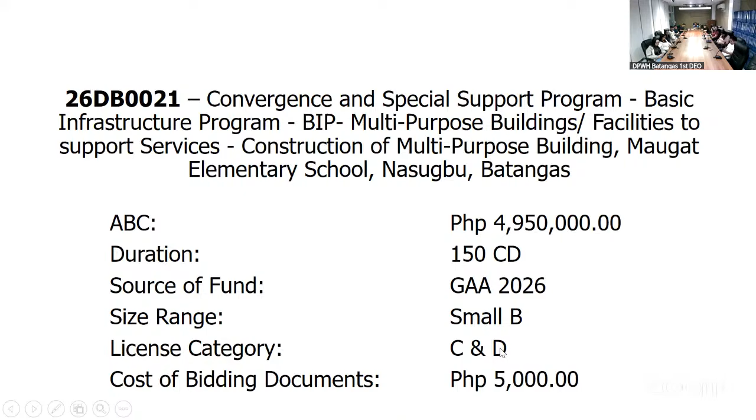To present the plans report, Ma'am Des, please proceed. Thank you. Good morning everyone, I am Engineer Maria Lourdes Mangaliman, and today I will be presenting our first project entitled Convergence and Special Support Program, Basic Infrastructure Program, BIP, Multipurpose Buildings Facilities to Support Services - Construction of Multipurpose Building, Maugat Elementary School in Nasugbu, Batangas, under the project type Construction of Multipurpose Building, with an appropriation of 5 million and an ABC of 4,950,000, and a project duration of 150 calendar days.

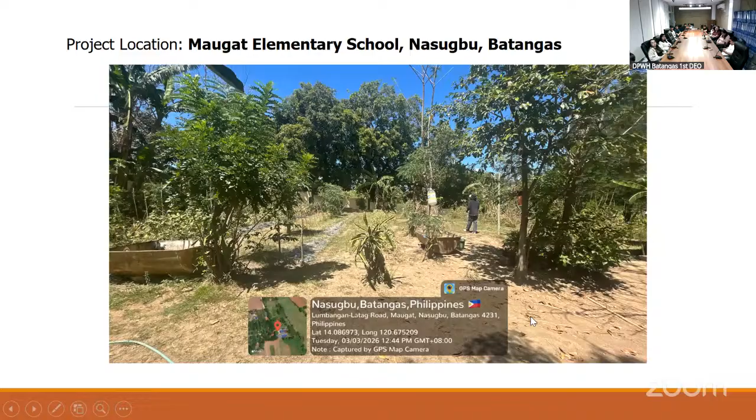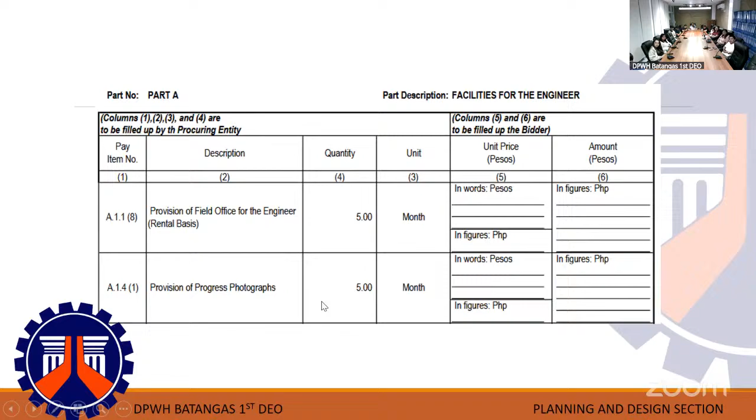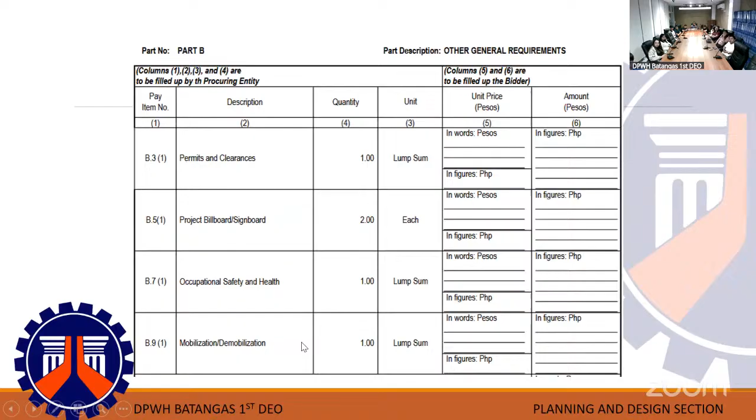The following is the scope of work of our project. For our BOQ, Part A covers facilities for the engineer - provision of field office for the engineer, provision of progress photographs. Part B covers permits and clearances, project billboard/signboard, occupational safety and health, and mobilization/demobilization. For Part C, earthworks, we have structure excavation for common soil, embankment from roadway structure excavation, common soil, embankment from borrow, common soil, and gravel fill.

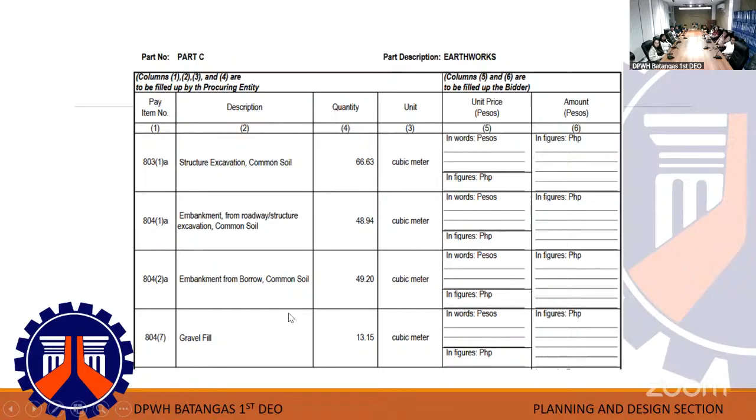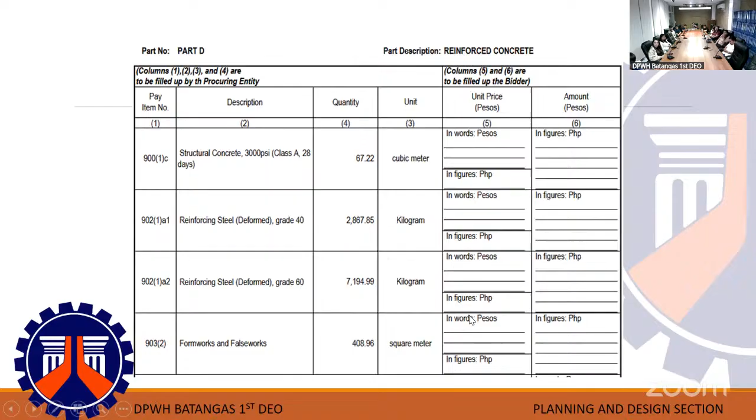For our Part D, reinforced concrete, we have structural concrete 3,000 PSI, Class A, 28-day. Reinforcing steel deformed grade 40, reinforcing steel deformed grade 60, formworks and false works.

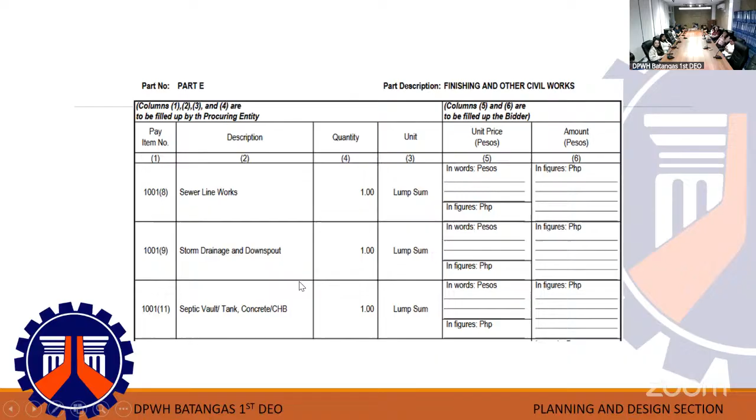For our Part E, finishing and other civil works, we have sewer line works, storm drainage and downspout, septic vault tank, concrete CHB, plumbing fixtures, cold water lines, cement board on metal frame ceiling, and carpentry and joinery works.

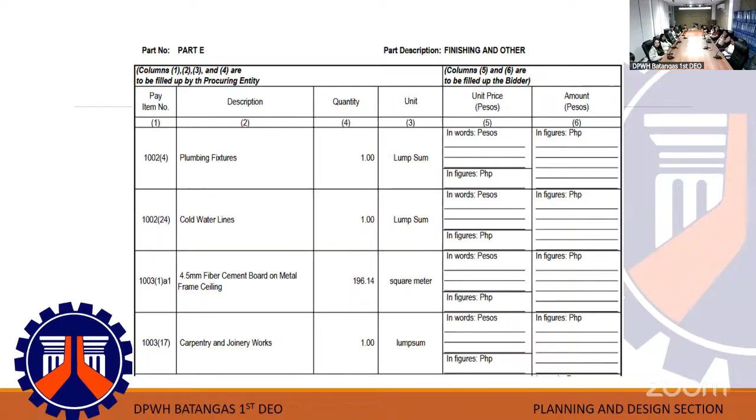We also have waterproofing, cement base liquid. We also have glazed tiles and trims on glazed tiles and plain cement floor finish. We also have cement plaster finish, painting works, masonry concrete, painting works on wood and steel.

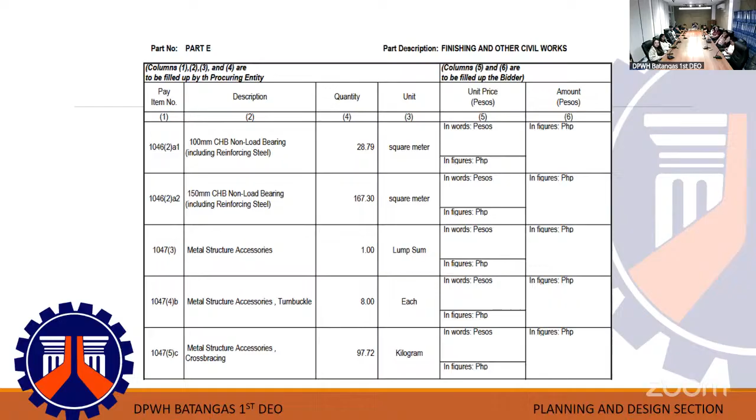For the next one, we have 100mm and 150mm CHB non-load bearing. We also have metal structure accessories, turnbuckle, cross bracings, and steel plates. We also have structural steel trusses, purlins, and railing.

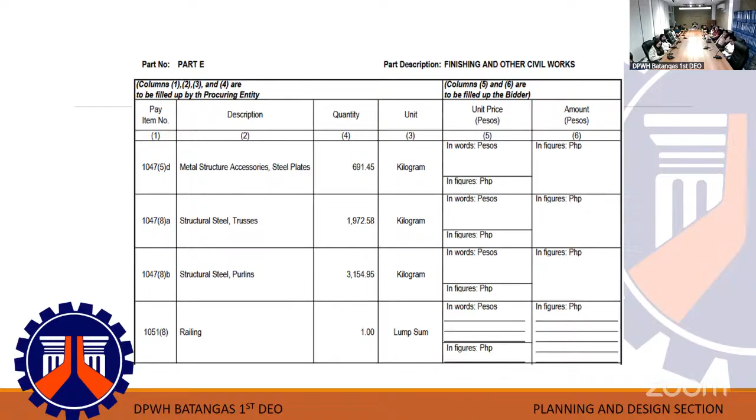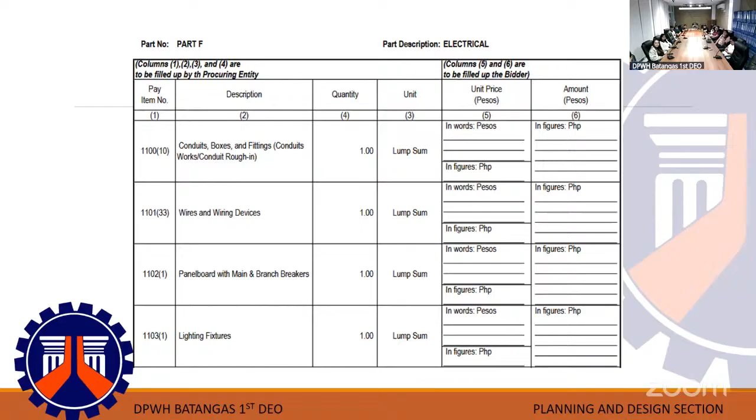For our Part F, electrical, we have conduits, boxes and fittings, wires and wiring devices, panel boards with main and branch breakers, and lighting fixtures. Lastly, for our Part G, mechanical, we have wall fans, exhaust fans, and fire extinguishers.

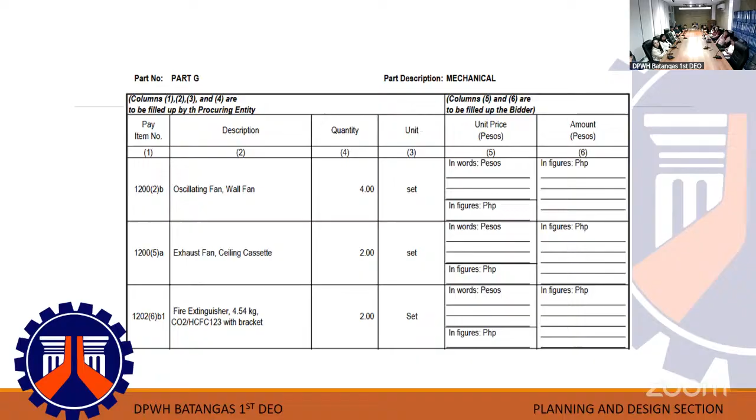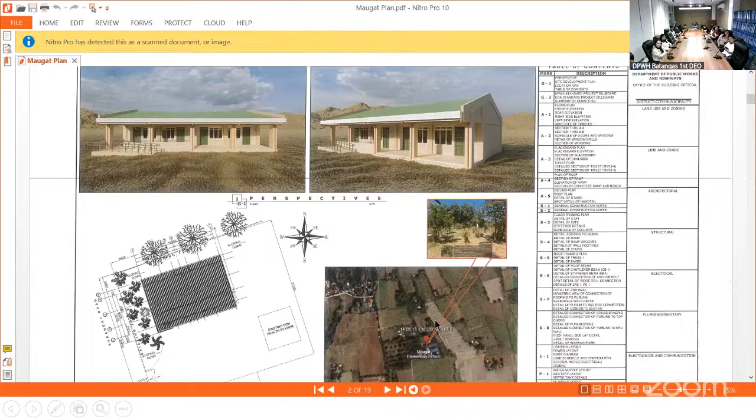Next, for our plan, as mentioned a while ago, here's the perspective of our one-story, two-classroom building. Here's the location map and the site development plan. Here's the billboard.

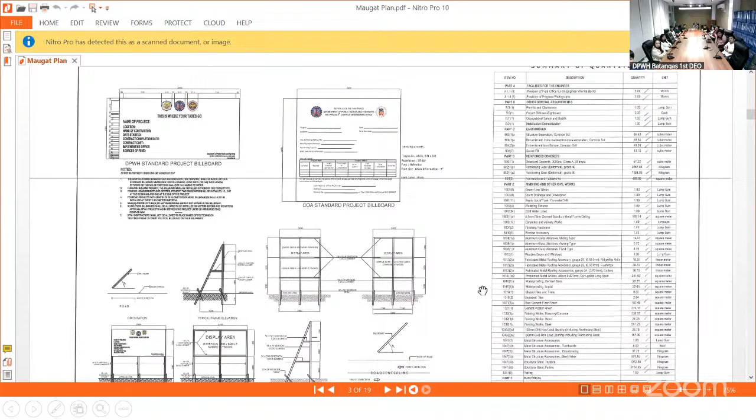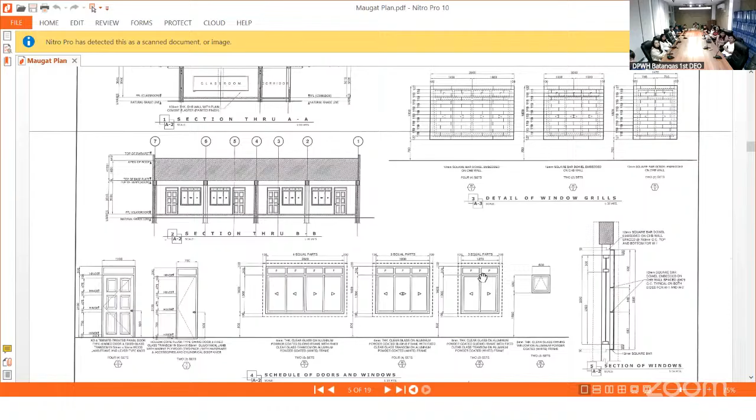We also have here the blackboard elevation, details of the chalkboard, blackboard, and detailed section of the toilet and the toilet plan. We also have the plan of our ramp and bench.

Next, we have the ceiling plan and the roof plan. We also have here the spot detail of handrail and detail of stairs.

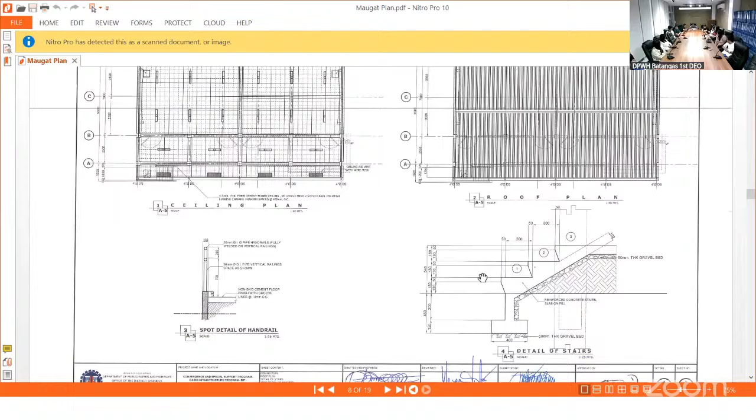So for our structural, we have the framing plan, the detail of the columns and the stiffener, the details of our footing tie beams and wall footings, as well as the stairs.

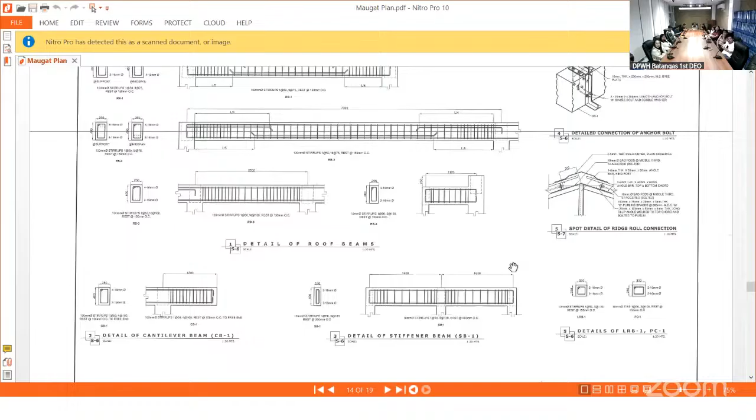And our roof framing plan, as well as the detail of trusses. We also have the detail of the roof beams and beams.

We also have the detailed connection of the cross bracing and the detail of purlin splice, as well as the connection of purlins to top chord.

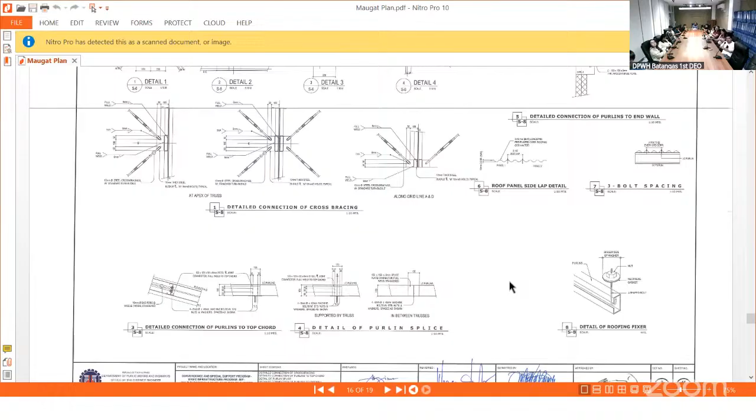And for our electrical, here's our lighting layout, power layout, and the riser diagram. And for our plumbing, we have the water supply layout, septic tank details, sanitary layout, and lastly, for our plumbing notes. That's all for me.

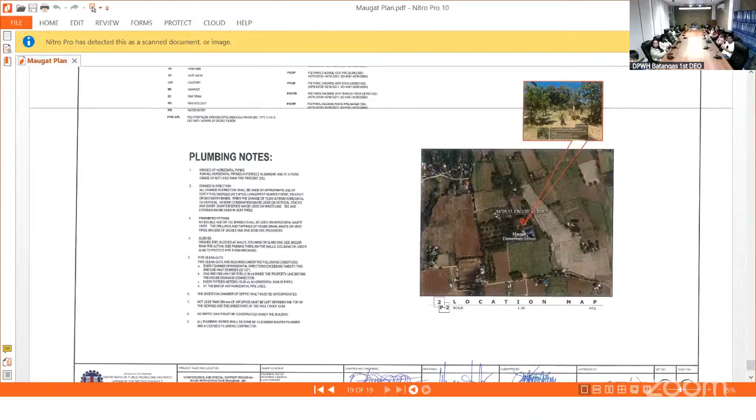Next, for our next project, we have 26DB0022, Convergence and Special Support Program Basic Infrastructure Program, BIP, Multipurpose Building Facilities to Support Services, Construction of Multipurpose Building, Balokbalok Elementary School, Nasugbu, Batangas, with an approved budget for the contract of 4,950,000. Contract duration of 150 calendar days, source of fund GAA 2026, size range small B, license category C&D.

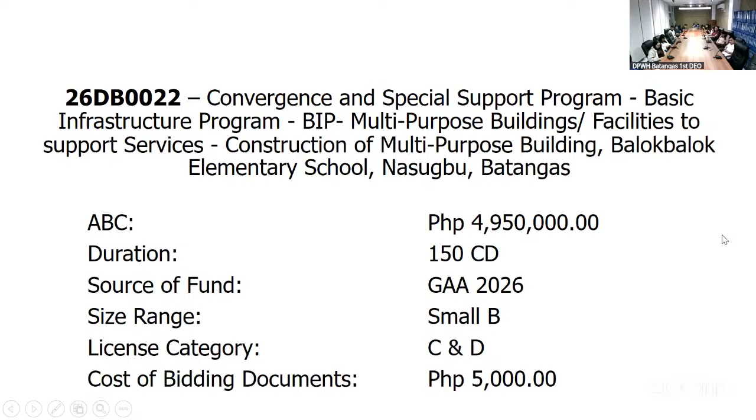Again, for our second project entitled Convergence and Special Support Program, Basic Infrastructure Program, Multipurpose Buildings, Facilities to Support Services, Construction of Multipurpose Building, Balokbalok Elementary School in Nasugbu, Batangas, under the project type of Construction of Multipurpose Building, with the same appropriation, 5 million, and 150 calendar days.

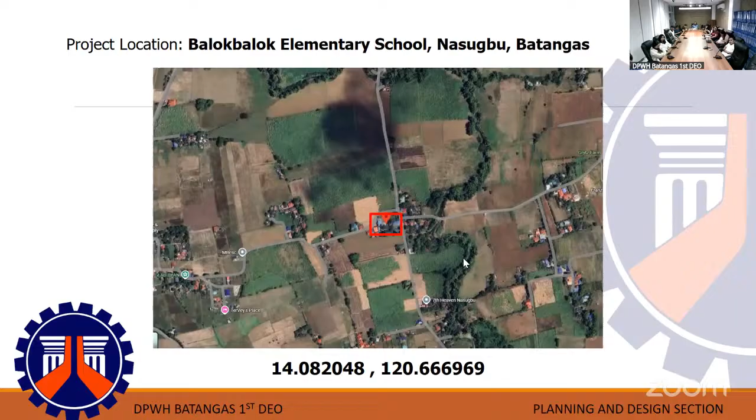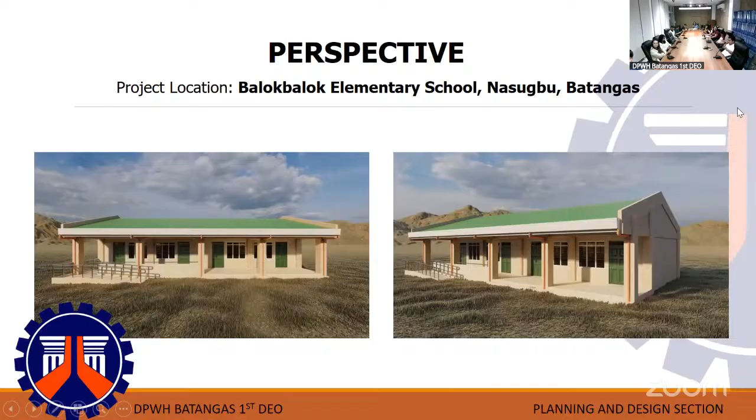Here's the site location in Balokbalok Elementary School in Nasugbu, Batangas. And here's the actual site condition. As mentioned, the perspective of our one-story, two-classroom building. And the following is the scope of work.

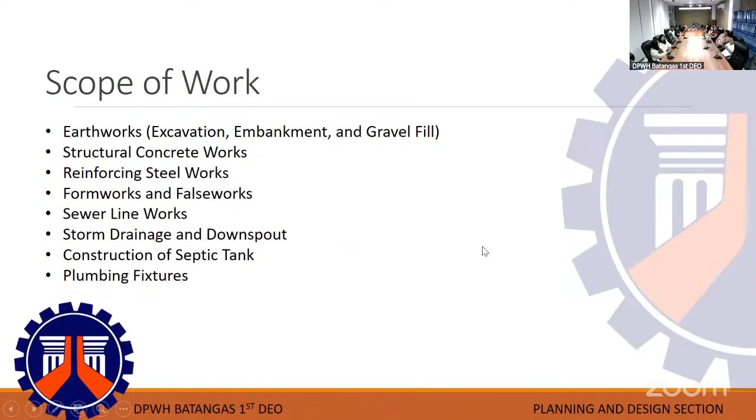This is for 2063-0023, Convergence and Special Support Program, Basic Infrastructure Program, BIP, Multipurpose Building Facilities to Support Services, Construction of Multipurpose Building, Covered Court, Nasugbu National High School, Nasugbu, Batangas, with an approved budget for the contract of 4,950,000, contract duration of 150 calendar days, source of fund GAA 2026, size range small B, license category C&D, and for the cost of bidding documents, 5,000 pesos.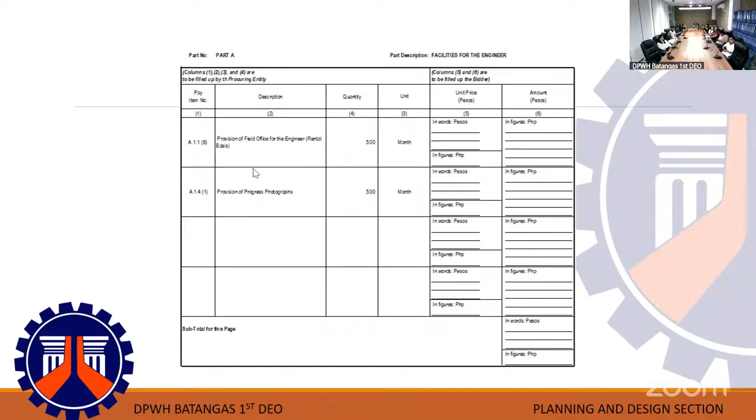For our bills of quantities, we have Part A, provision of field office for engineers, and provision of progress photograph. For the next one, we have permits and clearances, project billboards and signboards, occupational safety and health, and mobilization and demobilization.

For our next one, we have clearing and grubbing, structure excavation, common soil, embankment from roadways, structure excavation and common soil, embankment from borrow, common soil, and gravel fill.

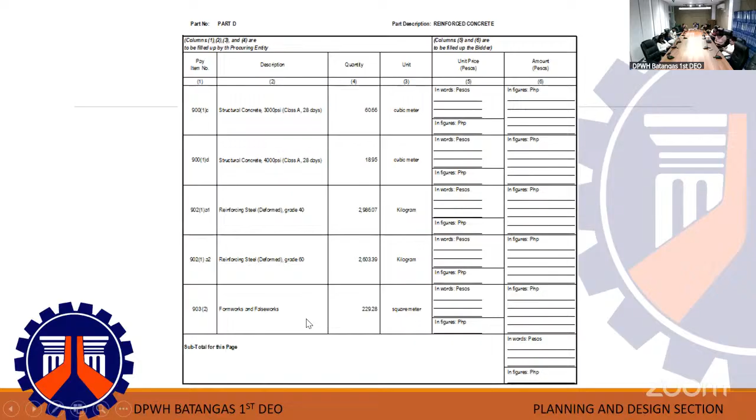For our next one, we have structural concrete, 3,000 PSI and 4,000 PSI. We also have reinforcing steel, grade 40 and grade 60, and formworks and false work.

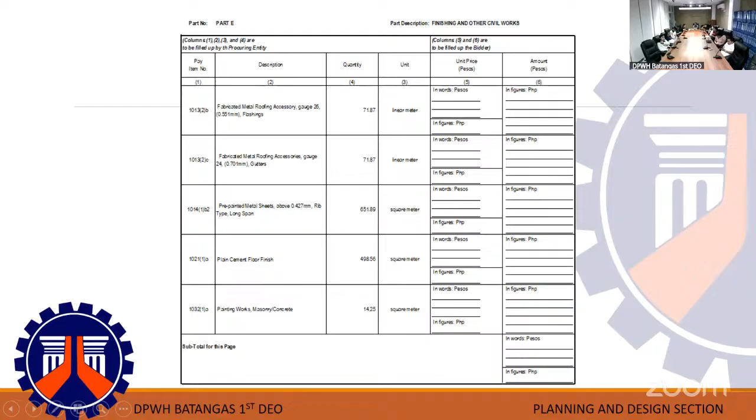For our next part, we have fabricated metal roofing accessories, flashing, and gutters. We also have pre-painted metal sheets, rib type long span, plain cement floor finish, and painting works for concrete. We also have painting works for steel.

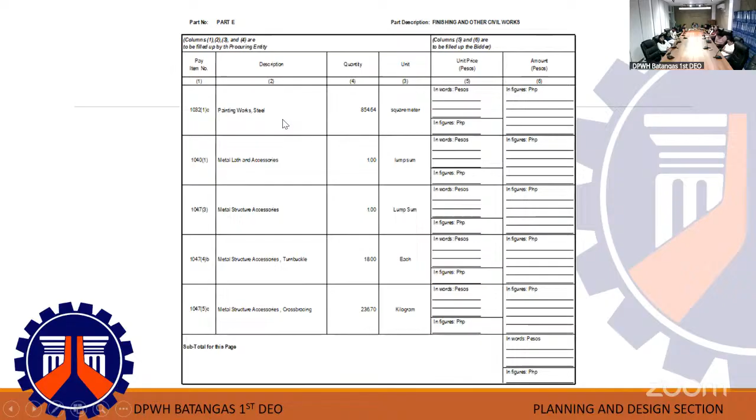We also have metal lath and accessories, metal structure accessories, turnbuckle, and cross bracing. We also have steel plates, structural steel, and structural steel purlin.

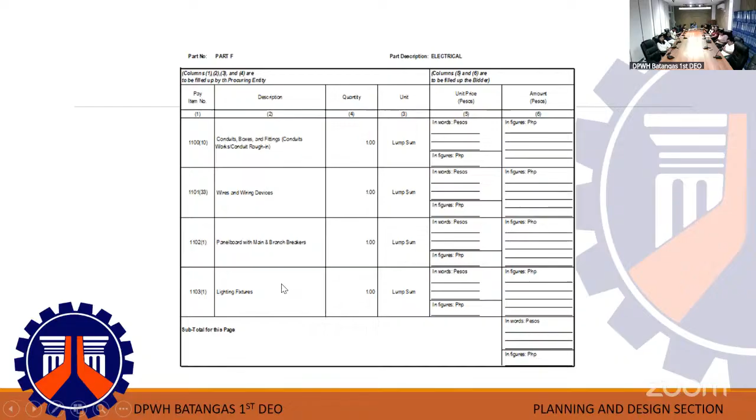For our part F, electrical, we have conduit boxes and fittings, wires and wiring devices, panel board with main and branch breakers, and lighting fixtures.

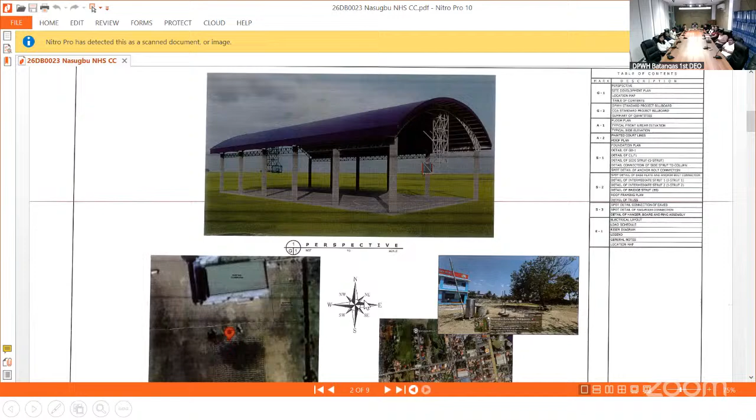Here, as shown in the perspective, the site development plan, and the location. Next, we have the signboards and billboards, and the scope, summary of quantity.

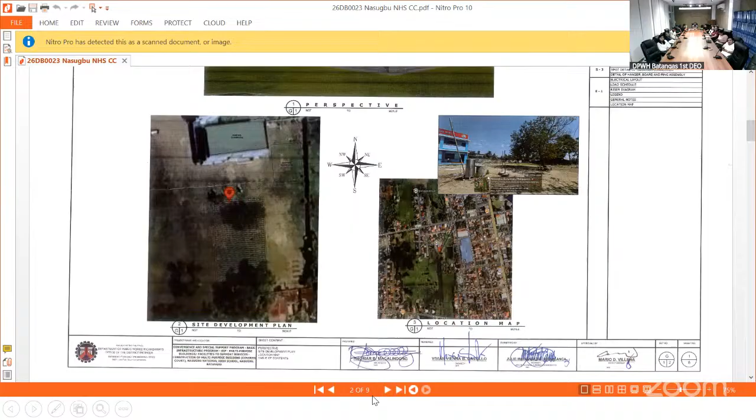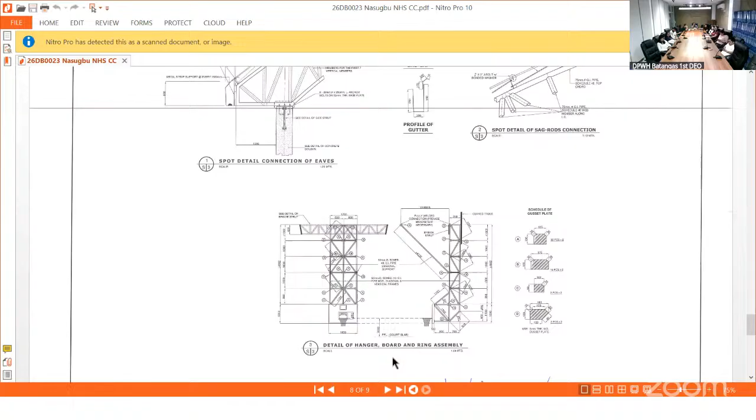For our last one, we have the electrical layout and the riser diagram. That's all. Thank you.

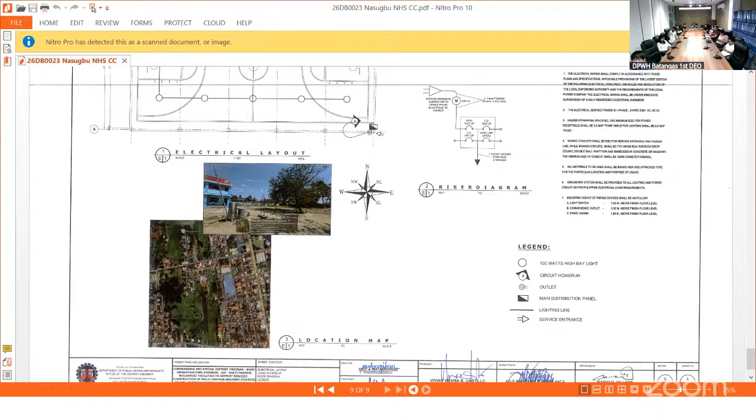For 2026, Convergence and Special Support Program Basic Infrastructure Program BIP, Multi-Purpose Building Facilities, Support Services, Construction of Multi-Purpose Building at Barangay Rillo, Batangas, with an approved budget for the contract of 4,950,000. Contract duration 150 calendar days. Source of fund, GAA 2026, size range small B, license category C&D, and cost of bidding document 5,000 pesos.

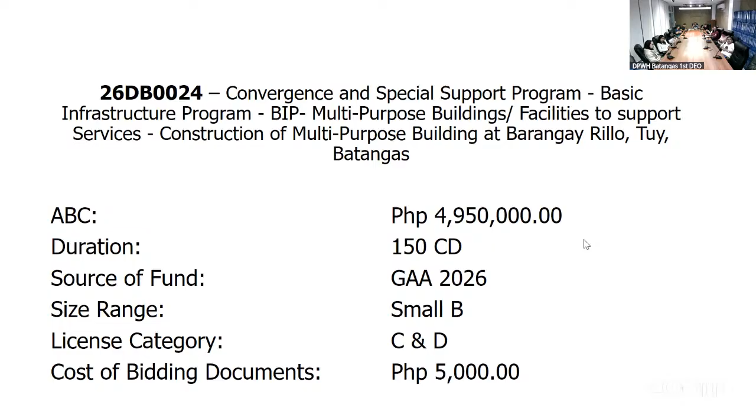I am here to present the project titled Convergence and Special Support Program Basic Infrastructure Program BIP, Multi-purpose building facilities to support services, construction of multi-purpose building at Barangay Rillo, Batangas, with a project type of construction of multi-purpose building and an approved budget of 4,950,000 and 150 calendar days.

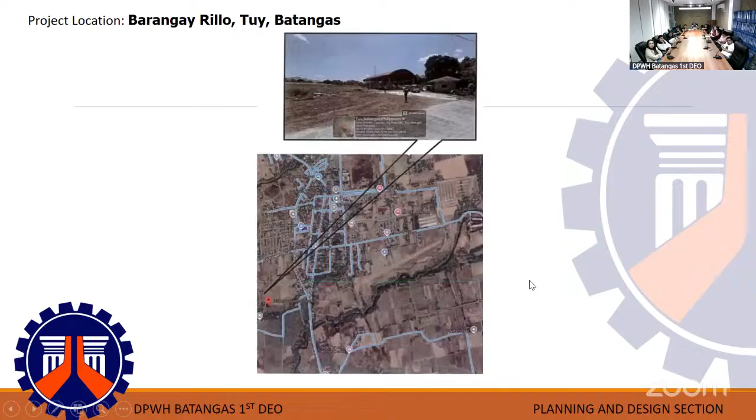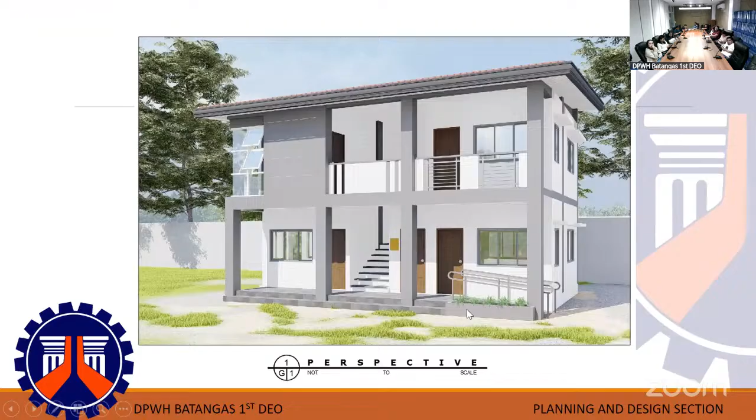So here is the location map for the project as well as the site development. And here you can see the perspective for the following scope of works.

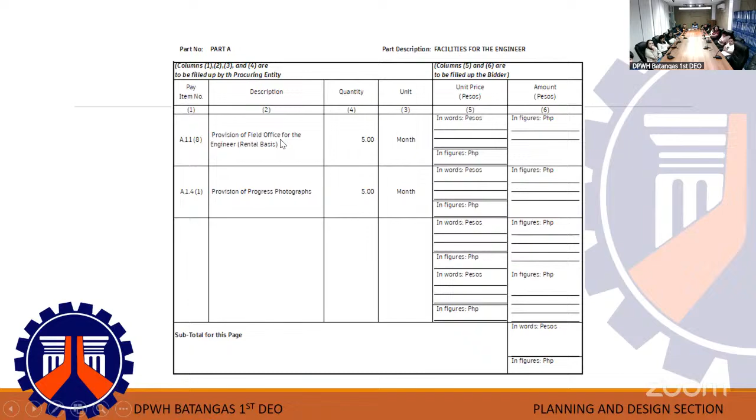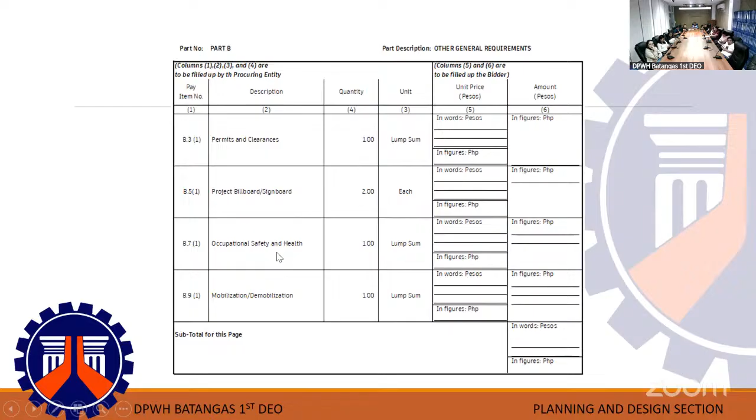For Part A, we have the provision of field office for the engineer, provision of progress photographs. For Part B, we have the permits and clearances, project billboard, signboard, occupational safety and health, mobilization, demobilization.

For Part C, structure excavation for common soil, embankment from roadway, structure excavation, common soil, gravel fill. For Part D, we have the structural concrete, 3,000 PSI and 4,000 PSI, class A, 28 days, reinforcing steel grade 40 and grade 60.

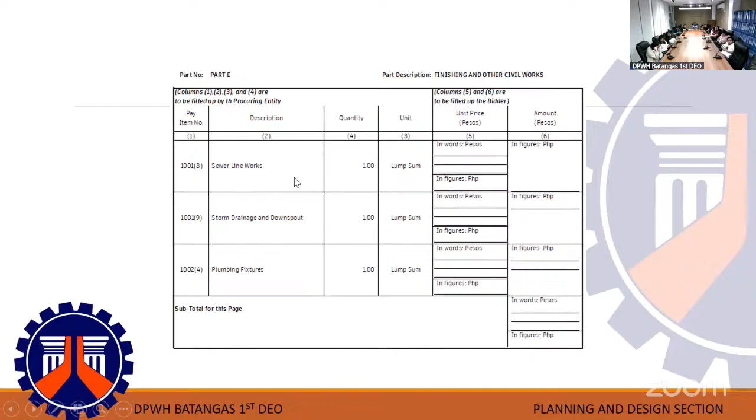First, we have the sewer line works. Next is the storm drainage and downspout and the plumbing fixtures, cold water lines, the fiber cement board on metal frame ceiling, carpentry and joinery works, finishing hardware, aluminum glass window.

Sliding type, the awning type, and the fixed type, the frame, flush door, doors, wood panel, the fabricated metal roofing for flashings, gutters, long span, rib type, waterproofing cement base, glazed tiles and frame, unglazed tiles, cement plaster finish.

Painting works for masonry, wood, and steel, 100mm HB non-load bearing and 150mm HB non-load bearing, metal structure accessories for steel plate, structural steel, and structural steel purlins.

For Part F, electrical, we have conduit boxes and fittings, wires and wiring devices, panel board with main branch breakers, lighting fixture.

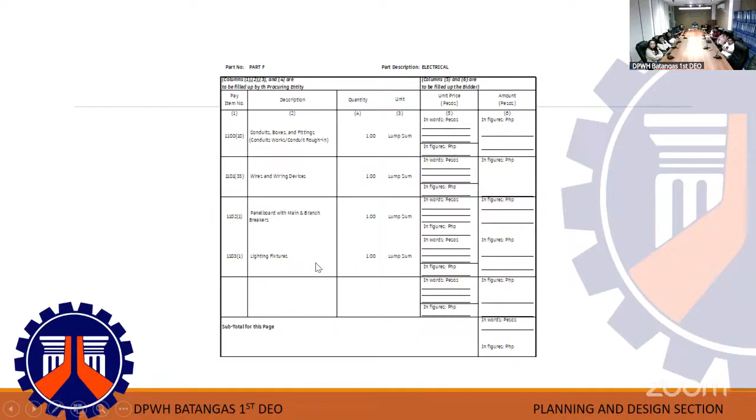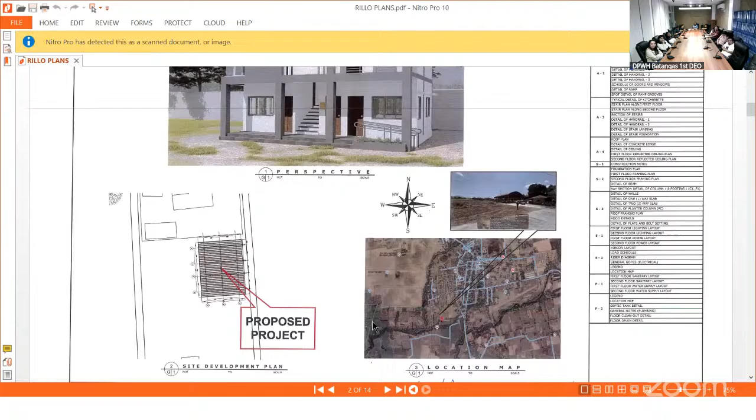Next, for the plans, we have here the perspective, the location map, and the site development plan. The project billboard, as well as the summary of quantities, the floor plan, second floor plan, and as well as the elevations.

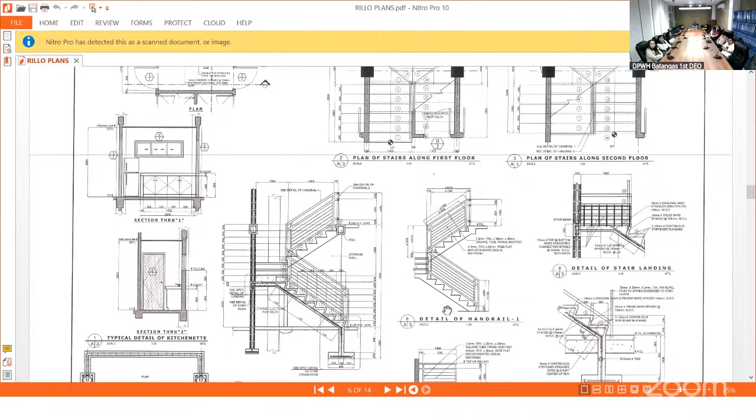The detail for ramp, detail for comfort room, schedule of doors and windows, the stair detail for the roof plan, and the reflected ceiling plan.

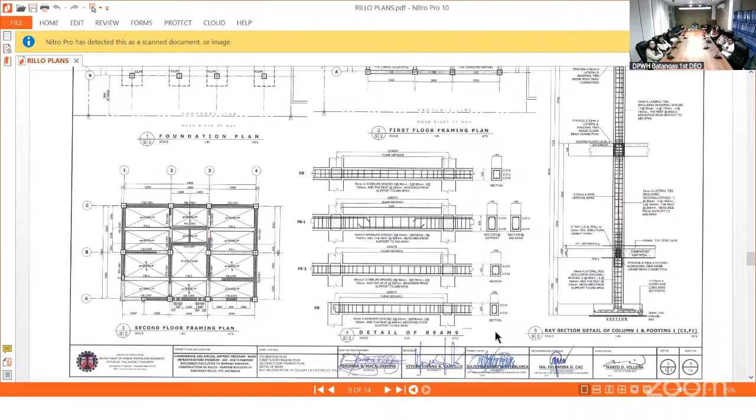The construction notes, the structural, specifically the foundation plan, the first floor framing plan and second floor, the detail of beams, columns, and as well the detail of walls and the roof framing plan.

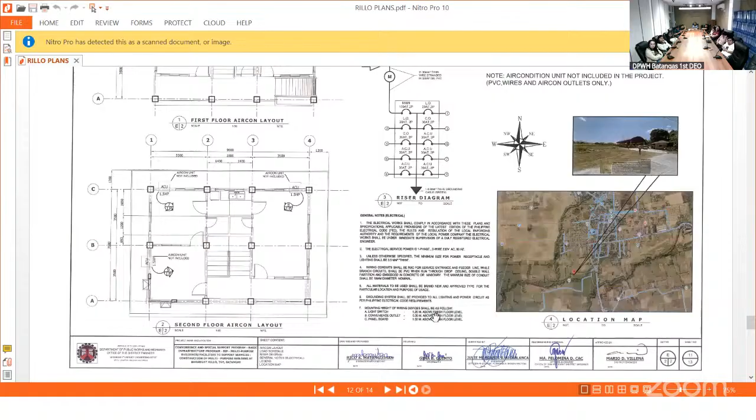Next is the lighting layout for first and second floor and the power layout as well, and the provision for aircon unit. Here is the sanitary layout for water supply, and here is the plumbing.

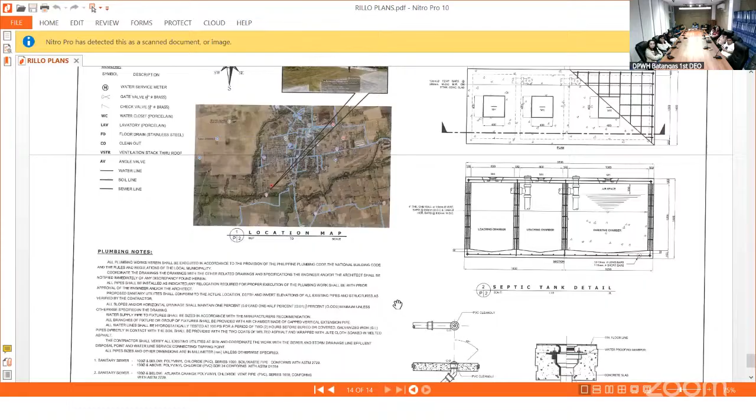Thank you, Engineer Adrian. Next is...

2060B0025. Convergence Special Support Program, Basic Infrastructure Program BIP, multi-purpose building facilities to support services, construction of multi-purpose building, covered court, Barangay Bunducan, Nasugbu, Batangas, with an approved budget for the contract of 4,950,000. Contract duration 150 calendar days, source of fund GAA 2026, size range small B, license category C and D, and cost of bidding document 5,000 pesos.

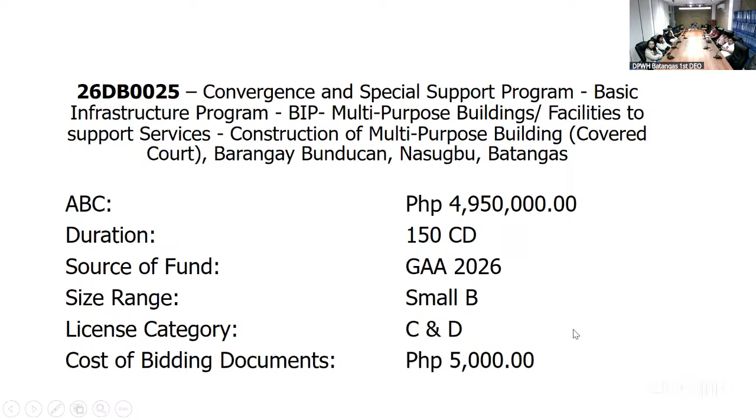Ready to give us, to discuss the scope of work again, Ma'am Eileen.

Good morning again. I am Engineer Hai and I will be discussing this project. Convergence and Special Support Program, Basic Infrastructure Program, BIP, Multipurpose Buildings, Facilities to Support Services, Construction of Multipurpose Building, Covered Court at Barangay Bunducan, Nasugbu, Batangas. Project type is Construction of Multipurpose Building, approved budget for the contract is 4,950,000 and 150 calendar days.

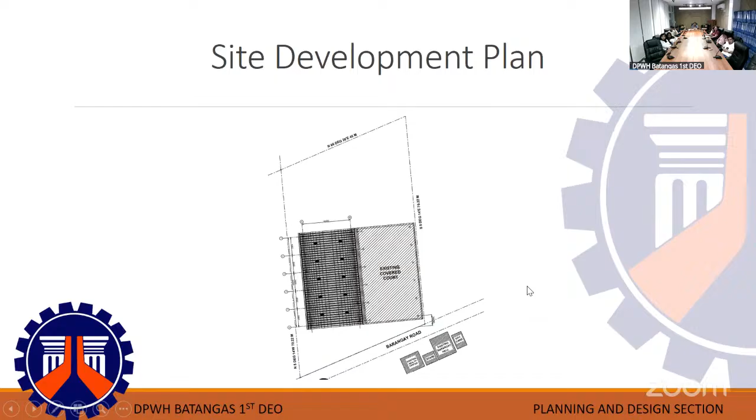Basically for the scope of works, the difference from the first covered court is that this one has no gutters and flashings. Also we have 150 mm CHB laying for the embankment. And the rest are for your reference. Thank you.

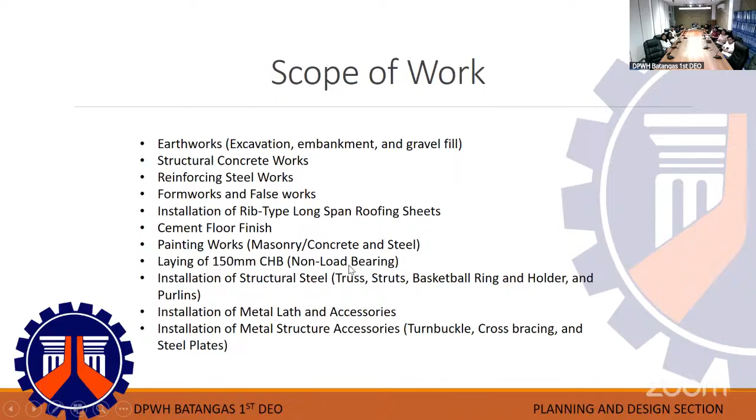Well, let's proceed with the next project. This is for...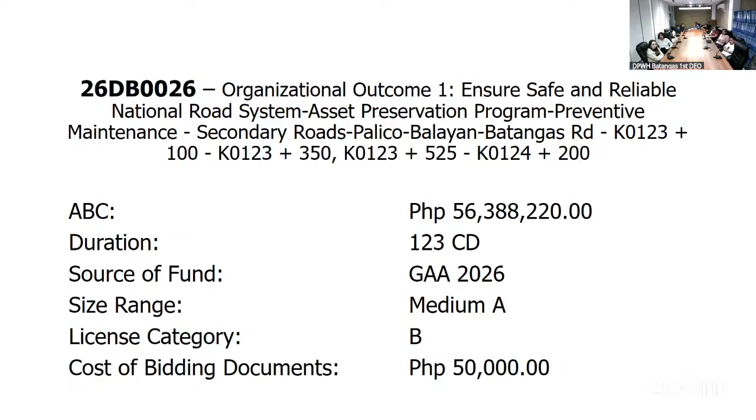Okay, to present the plans and scope of work, we have Ma'am Julie Beatriz.

Good morning to everyone. I am Engineer Julie Beatriz Olaso and I am here to present the project entitled Organizational Outcome 1, Ensure Safe and Reliable National Road System, Asset Preservation Program, Preventive Maintenance, Secondary Roads, Palico-Balayan-Batangas Road, Kilometer 0123 plus 100 to Kilometer 123 plus 350, and Kilometer 123 plus 525 to Kilometer 124 plus 200. The project type is asphalt overlay with an approved budget of the contract of 56,388,220 pesos, and the project duration of 123 calendar days.

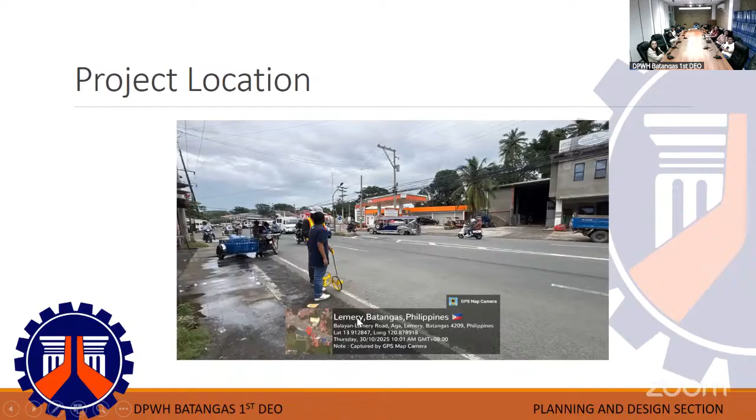So here's our project location, located in Lemery, Batangas. For our scope of work, we have the asphalt overlay, removal and replacement of existing asphalt pavement for correction, and reflectorized thermoplastic pavement markings.

For our bill of quantities, Part A covers provision of field office for the engineer on rental basis, provision of furnitures and/or fixtures, equipment and appliances for the field office for the engineer, provision of field office staff for the assistance to the engineer, and provision of progress photograph. For Part B, we have the project billboard and signboard, occupational safety and health program, traffic management, and mobilization and demobilization.

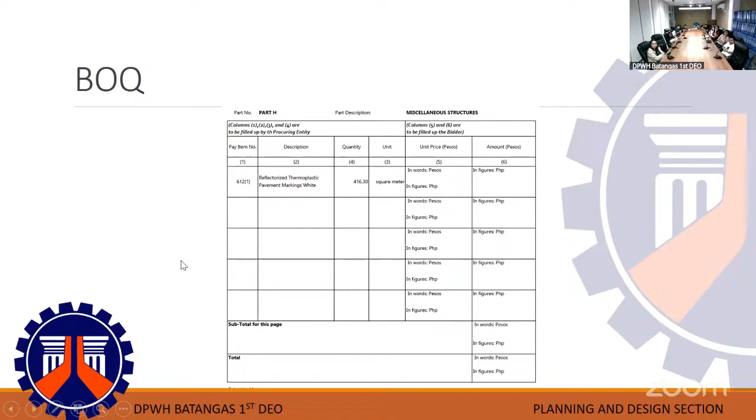For Part C, we have removal of actual structures obstruction, 0.05 meters thick and 0.10 meters thick, surplus common excavation and subgrade preparation common material. For Part D, we have the Portland Cement Stabilized Road Mix Base Course new soil aggregate. For Part E, we have the bituminous prime coat MC cutback asphalt grade 70 emulsified asphalt, bituminous concrete surface wearing and binder course 50 mm hot laid. And for Part H, we have the reflectorized thermoplastic pavement markings white.

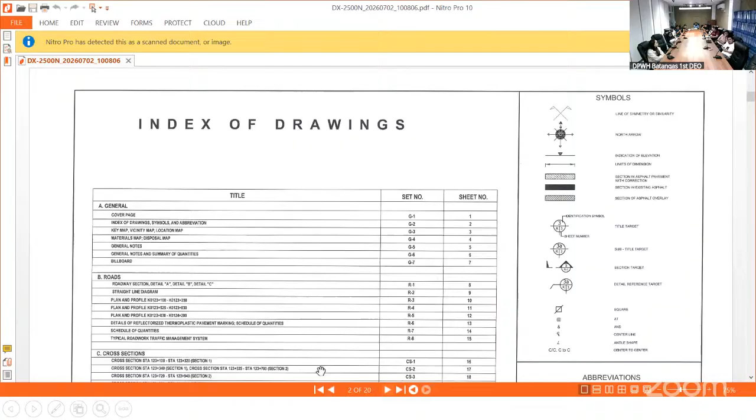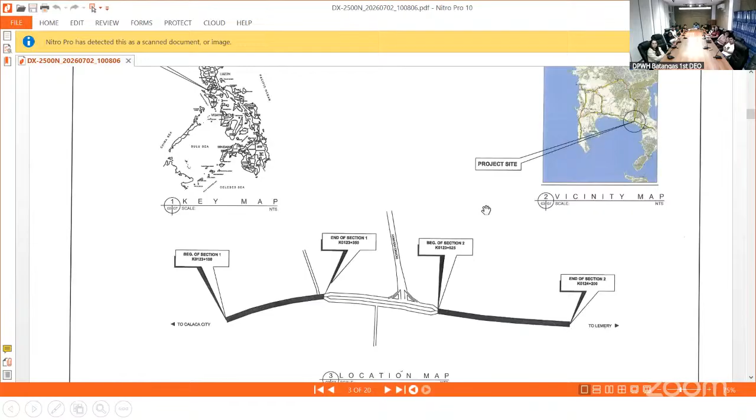So for our plans, here's our index of drawings and symbols. The project site, the location map, and vicinity map. Our materials and disposal map. General notes and the summary of quantities. Our standard project billboard. Our roadway section as well as the detail A, B, and C.

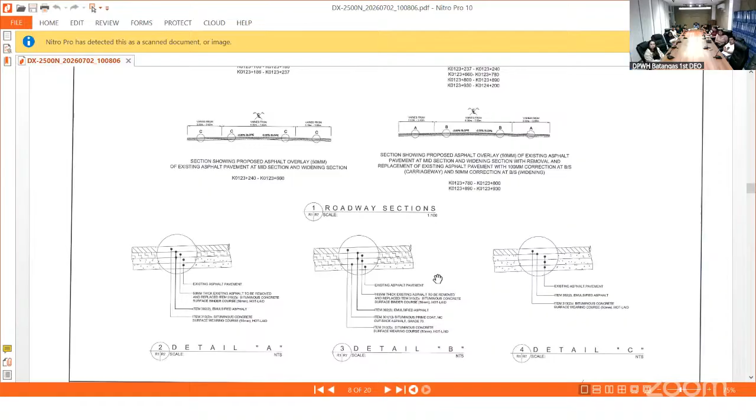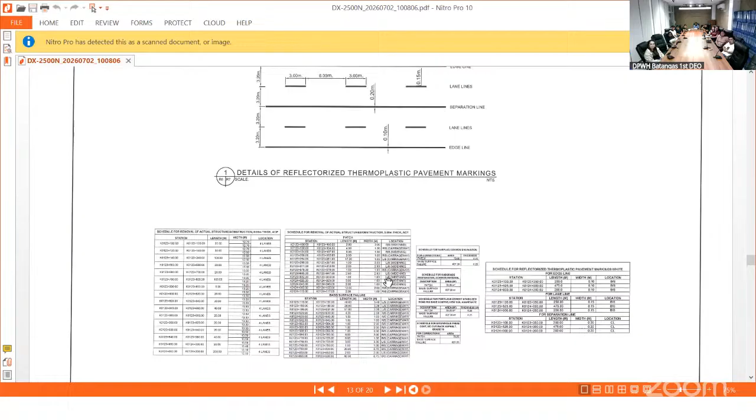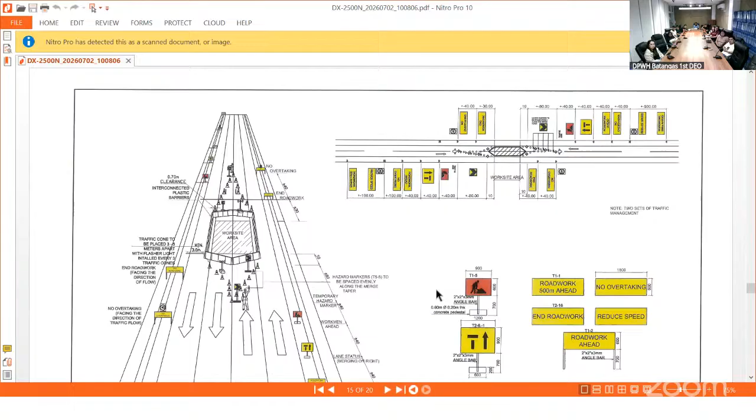Here's our straight line diagram and the plan and profile. The details of reflectorized thermoplastic pavement markings as well as the schedule of the quantity. The typical roadwork traffic management system. And here's our cross section for every 20 meters. That's all, thank you.

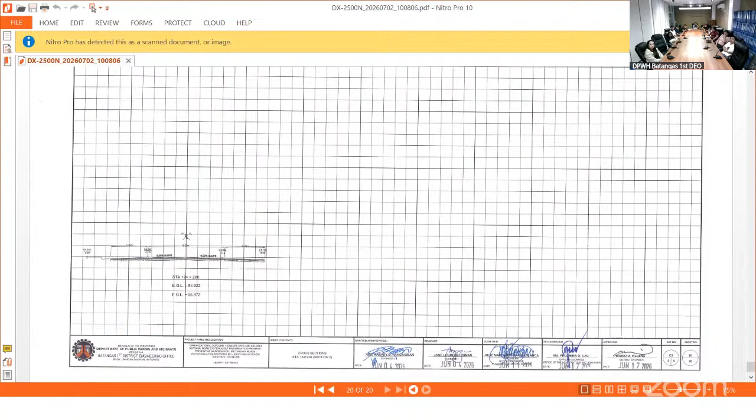Okay, thank you, Bea. Okay, so to give us the general information and other instructions related to the bid at hand, we have Chief Jobert Balria as back-up regular member.

Good morning, everyone. So for the general information, bidding will be conducted through competitive bidding procedures using a non-discretionary pass or fail criterion. Bidding is restricted to Filipino citizens, sole proprietorship, cooperatives, and partnerships or organizations with at least 60% interest or outstanding capital stock belonging to citizens of the Philippines. Next, a complete set of bidding documents may be acquired by interested bidders until before 10 a.m. of July 14, 2026 from the Procurement Unit Office, DPWH Batangas First DEO, and upon payment of the applicable fee.

Bidding documents may also be downloaded free of charge from the PhilGEPS and DPWH websites, provided that bidders shall pay the applicable fee for the bidding documents before the submission of their bids.

Bids must be duly received by the BAC Secretariat through either manual submission to the Procurement Unit Office, DPWH Batangas First DEO, or online electronic submission through electronic bids_Batangas1 at dpwh.gov.ph on or before July 14, 2026 at 10 a.m. Late bids shall not be accepted.

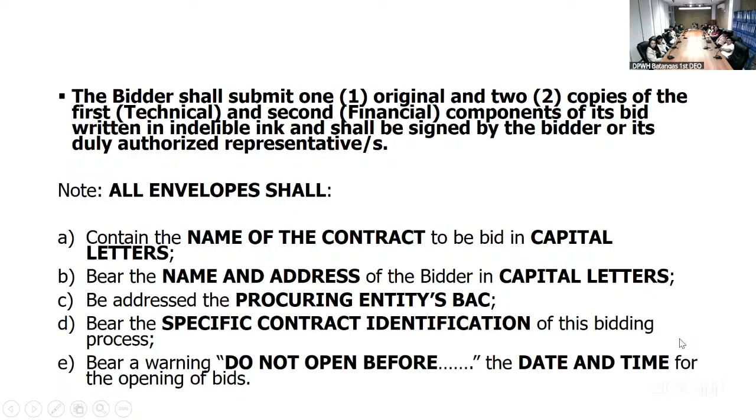Note, all envelopes shall contain the name of the contract to be bid in capital letters. It should bear the name and address of the bidder in capital letters, be addressed to the procuring entity's BAC, bear the specific contract identification of this bidding process, and bear a warning: do not open before the date and time for the opening of bids.

The bidder shall enclose their original eligibility and technical documents in one sealed envelope marked original technical component, and the original of their financial component in another sealed envelope marked original financial component, sealing them all in an outer envelope marked original bid.

Each copy of the first and second envelopes shall be similarly sealed, duly marking the inner envelopes as copy number, technical component, and copy number, financial component, and the outer envelope as copy number. Note, these envelopes containing the original and copy shall then be enclosed in one single envelope.

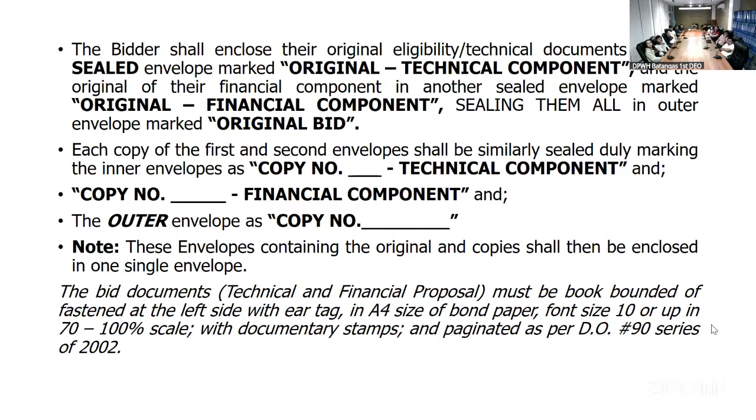The bid documents, technical and financial proposal, must be book-bound or fastened at the left side with ear tags, on A4 size bond paper, font size 10 or up, in 70 to 100% scale, with documentary stamps and paginated as per DO number 90 series of 2002.

Bid opening is on July 14, 2026 at 10 a.m. at the BAC conference room, DPWH Batangas First DEO, and bids will be opened in the presence of the bidders' representatives who choose to attend the activity.

Contractors who wish to participate in the bidding are encouraged to enroll in the DPWH Civil Works application at the DPWH Procurement Service, while those already enrolled shall keep their records current and updated.

If during the post-qualification process, BAC verifies any deficiency due to contractor's fault or negligence pursuant to Section 63.2 of the IRR of RA 12009, the procuring entity will disqualify the contractor from award without any right for reimbursement of fees. Additional project requirements as mandatory submission of the following under ITB 12.1.

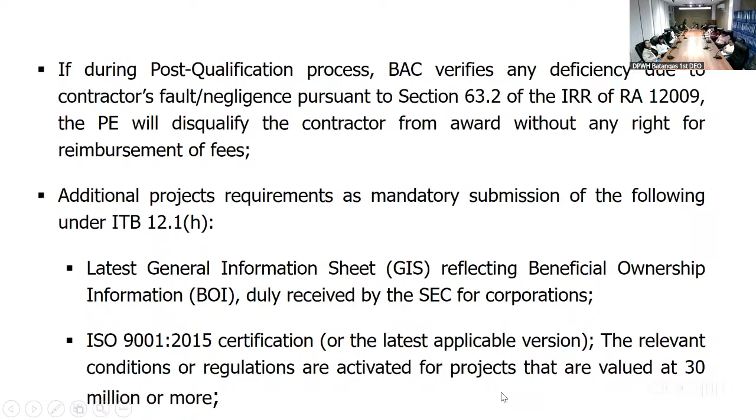First, latest General Information Sheet reflecting beneficial ownership information duly received by the SEC for corporations. ISO 9001:2015 certification or the latest applicable version. The relevant conditions or regulations are activated for projects that are valued at 30 million or more.

The DPWH reserves the right to reject any and all bids, declare a failure of bidding, or not award the contract at any time prior to contract award in accordance with Section 70 of RA number 12009, without thereby incurring any liability to the affected bidders.

For contractors with an official representative, they are required to secure a special power of attorney for single proprietorship, while for corporations or incorporated entities, they are required to present a secretary's certificate together with their latest board resolution.

You may visit the following website for downloading of bidding documents at www.dpwh.gov.ph and www.philgeps.gov.ph. And for electronic submission of bid, electronic bids_Batangas1 at dpwh.gov.ph.

For further information, please refer to Engineer Andrew Fernandez Marquez, BAC chairperson at DPWH Batangas First DEO, 043-703-0004, and BAC secretariat with the same address and phone number.

Deadline of submission of bids, July 14, 2026, on or before 10 a.m. Opening of bids, July 14, 2026 at 10 a.m. Address, BAC conference room, DPWH Batangas First DEO, Barangay Lanatan, Balayan, Batangas.